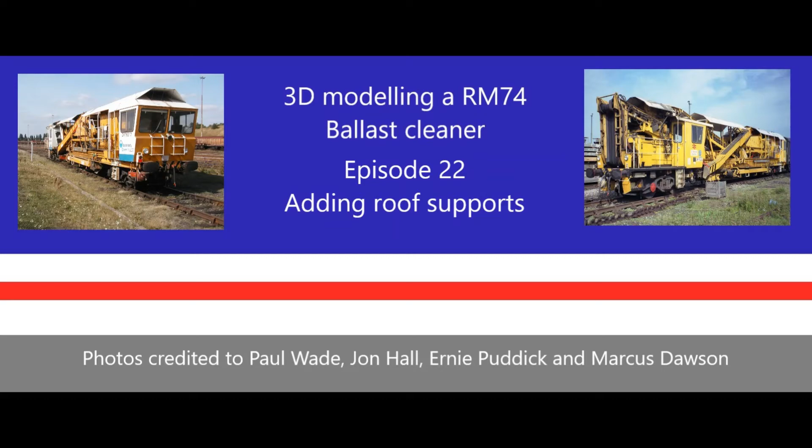In today's episode I'm going to look at adding some more supports for the roof sections that we've drawn, specifically looking at these three in this area here. There is a couple more that we'll be looking at on the left hand edge here. We're looking to do these three to start with.

And looking at the parts themselves, they actually look like they're all attached to the spoil conveyor belt. So obviously we'll model that the same. And this one on the end here, this looks like it's attached to the inside of the pick conveyor.

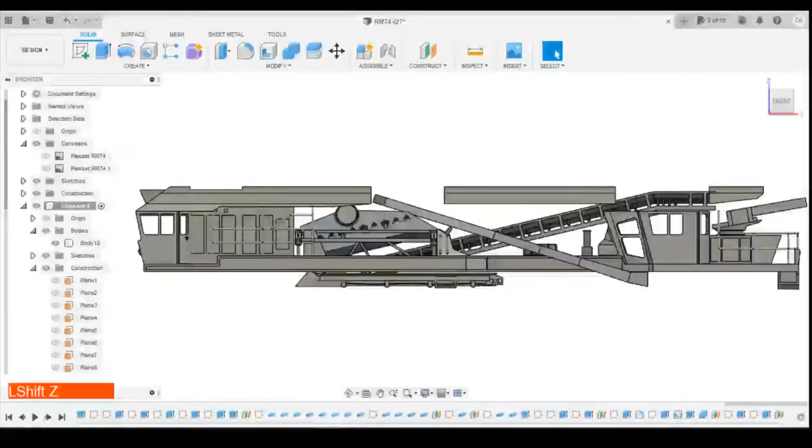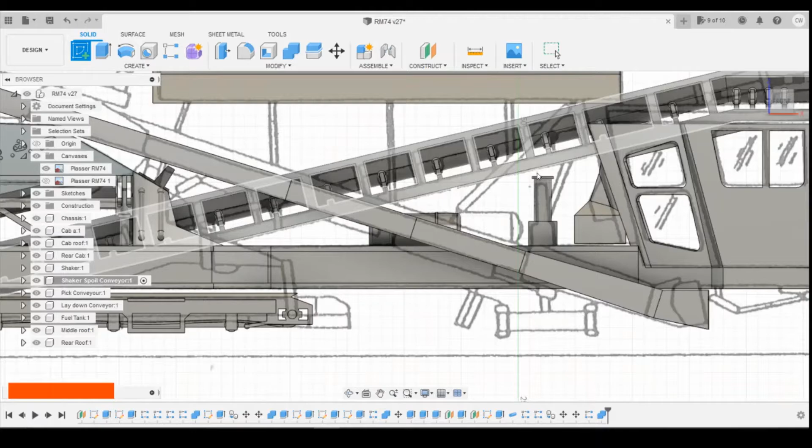So jumping into Fusion, if you look at the canvas, they're all drawn on here so we can get the relative positions there nicely for them. So the first thing we'll do is make sure we've got the shaker spoil conveyor selected, which as I say we're drawing on the side of this. So zooming in, I'm going to create a sketch on the outside surface of that conveyor belt, and we'll start by just doing the rectangle.

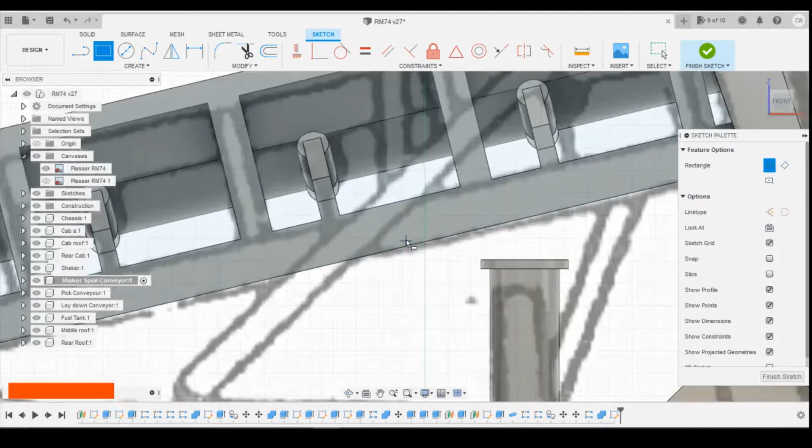I think, although looking at the shape it's a piece of right angle iron, parts would be too small really to draw them on to scale and expect them to print particularly well, and then be strong enough to hold the roof at the same time.

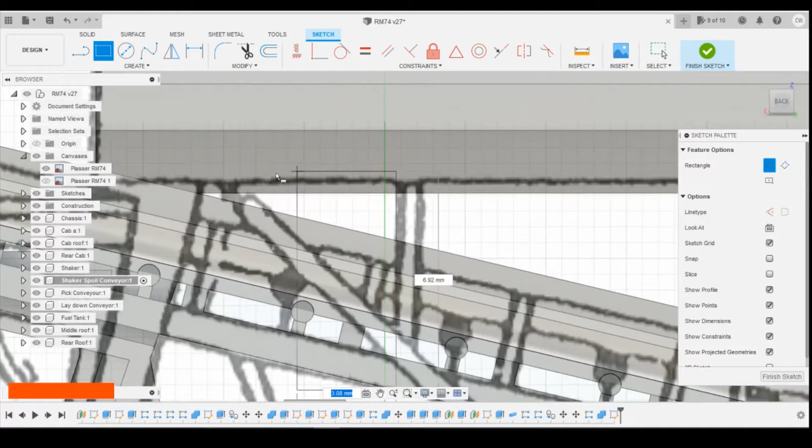So I've just selected a point which attaches to the bottom of the part here, and then we're going to come up and draw an upright that's going to come up to, spin this round to the back. It needs to be touching into the roof. So let's create the width. Looks like it matches about right. So we'll define

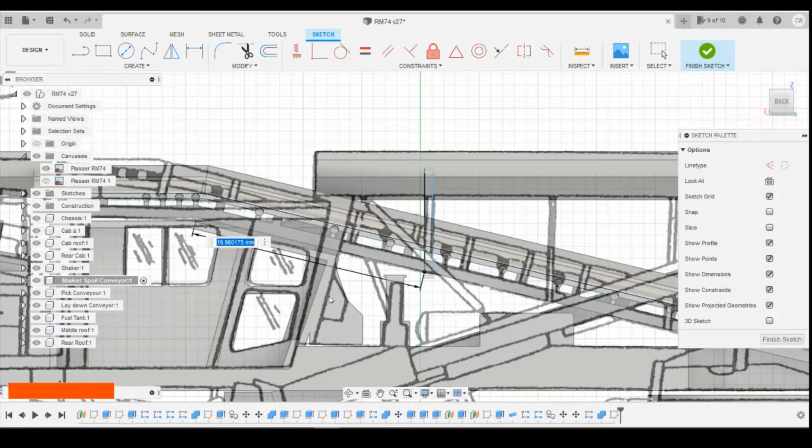relative position. I'm going to go from that end of the diagonal part here, so let's change that to 20 just for ease, and then we'll say thickness 0.7 millimeters.

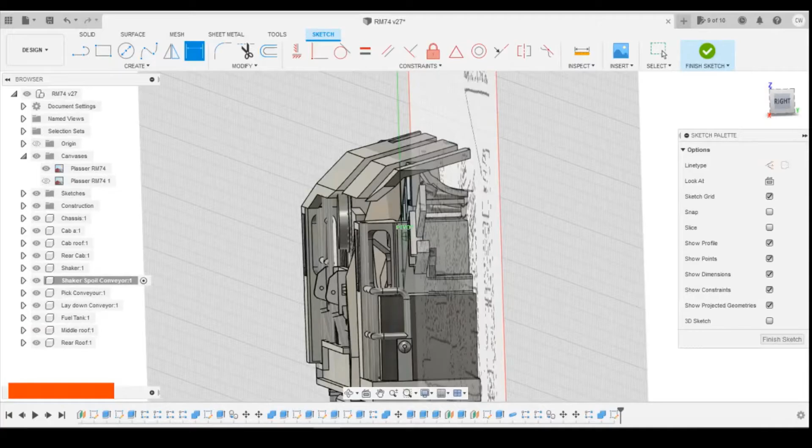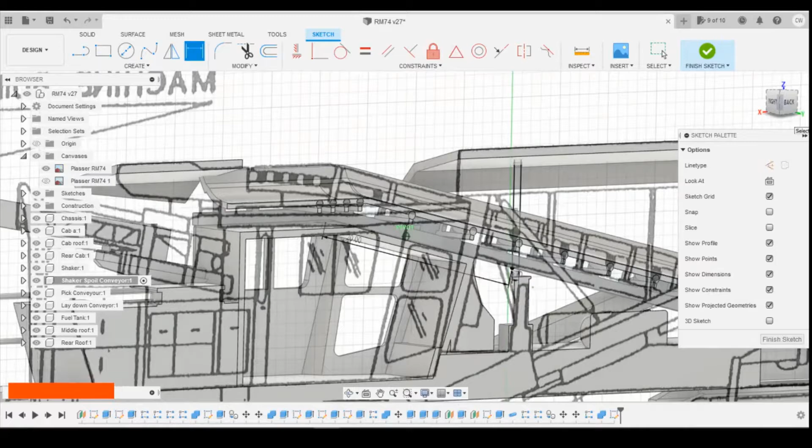Actually getting the height is going to be a bit difficult. What it might be better to do is draw the other direction, draw 90 degrees to it. Then we can match this profile. No, what we can do is what we're doing at the moment. Got a plan here. So if we do that 9 millimeters.

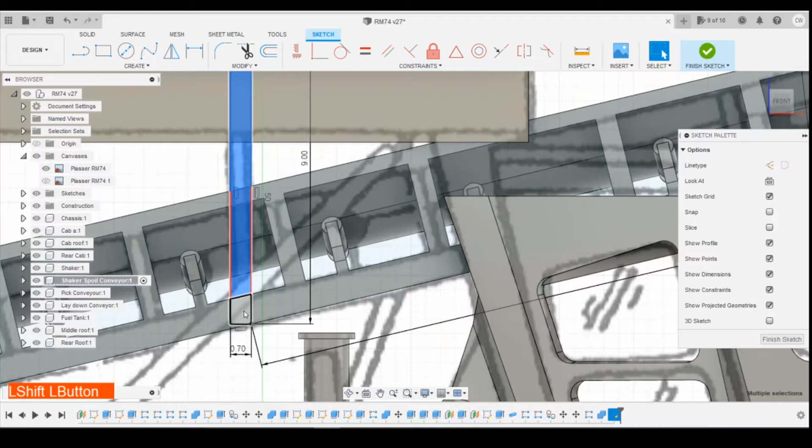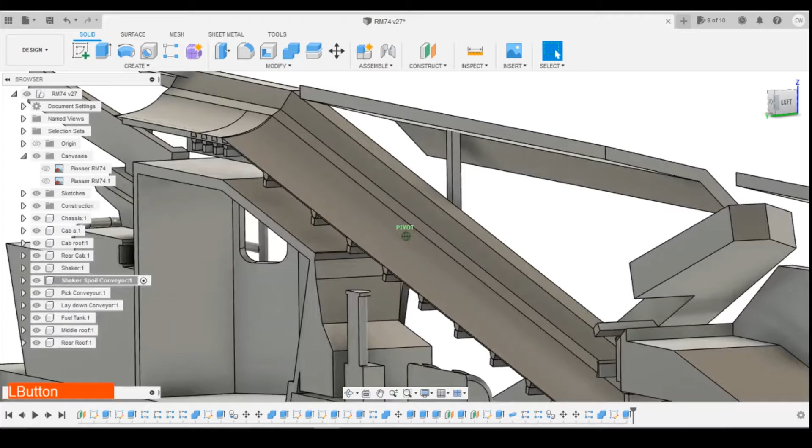Select the various profiles that we've got here. Hold shift down while you do it. And we can extrude that. I think maybe 0.5 millimeters. So it's a new body, I think, initially. Okay, and let's have a look what we've got in here. So see how it's gone up into the roof, that's fine.

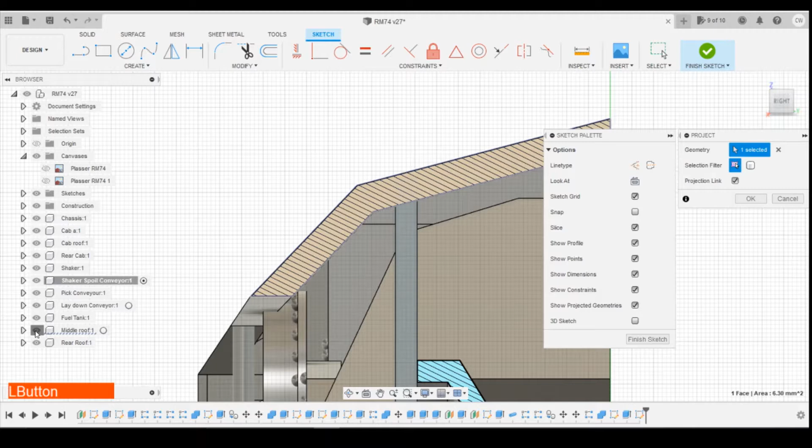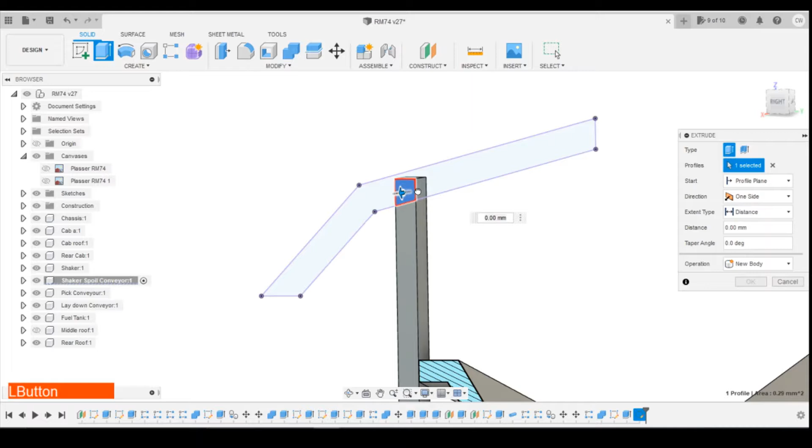So what I can do now is do a sketch on the side face there, slice through, project that angle on, and then turn the roof off. Project that angle, okay, turn the roof off, now we can get that profile, okay. We can extrude that off the top. So that would then match the same profile as the roof there.

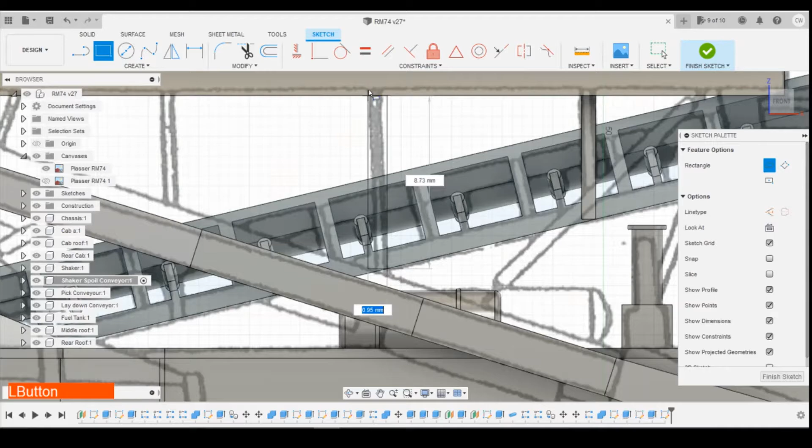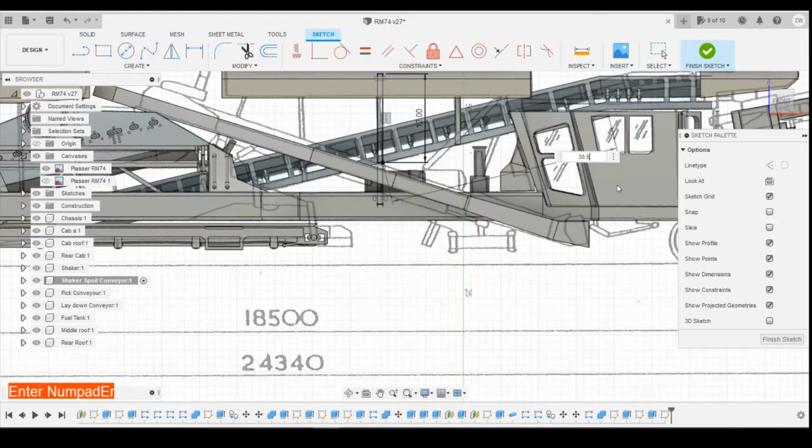Let's do the same for the next one along. So again, same sketch on the side profile here. So width is 0.7. Let's go 12 millimeters up. Define the distance from there to the top, 30.5. 6. There we go.

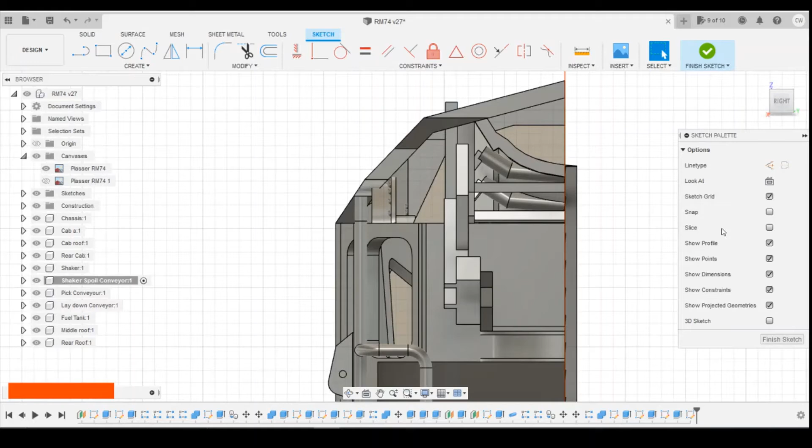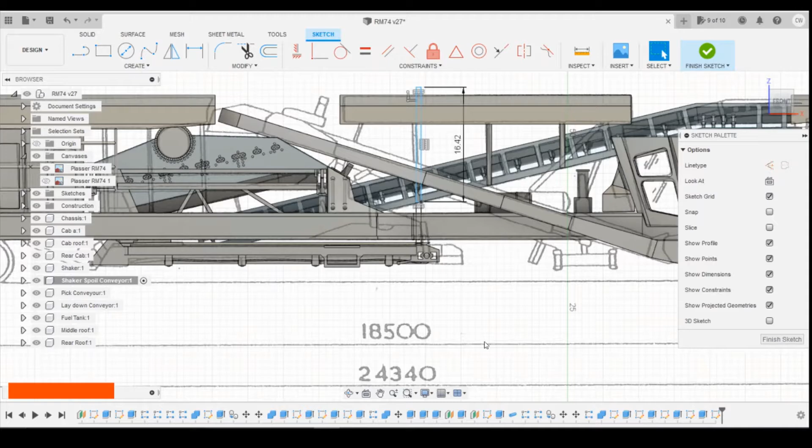And then we'll extrude all of these. So holding shift down again, selecting these profiles. Extrude 0.5. Sketch on the side there. Slice through. Project the roof profile. Turn the roof off, and then we can extrude that off the top. That's that one.

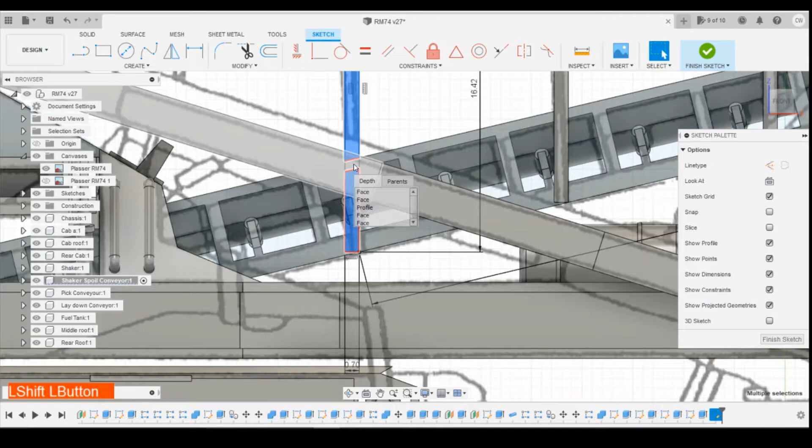And do the same for the last one here. Width 0.7. Doesn't matter about the height because we cut the top off. I'm going to move position down a little bit with the dimension here. So I'm going to say 41 millimeters, a bit more. 1.2. There we go.

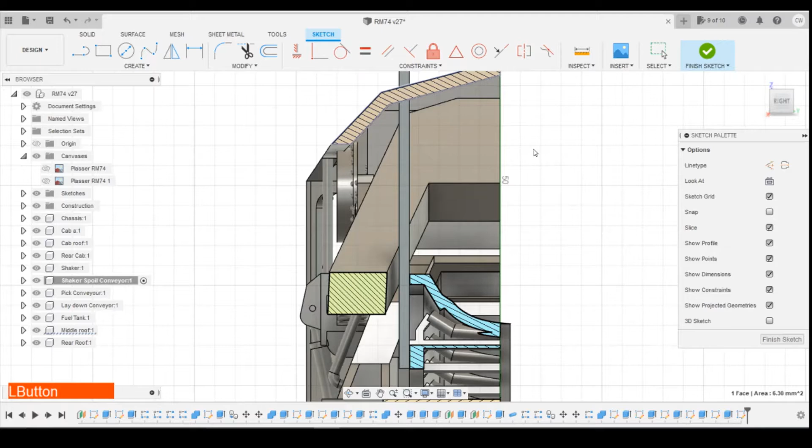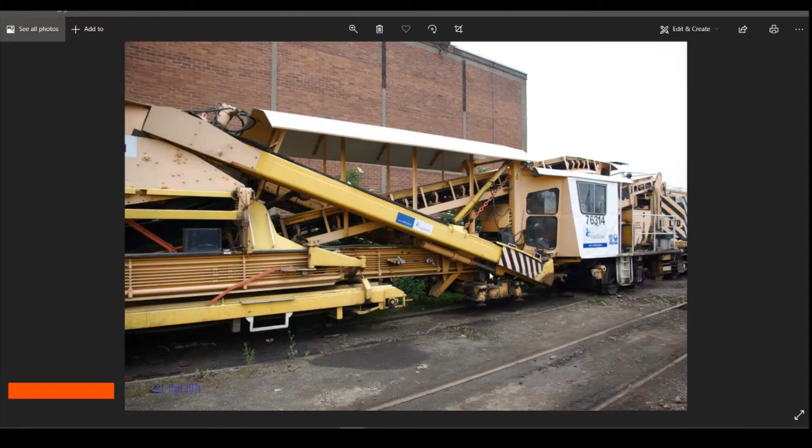Then select all these profiles. Extrude by 0.5. Make sure it's not clashing on the side of that conveyor belt here, which is not. It's good. Turn canvas off, create a sketch on that inside profile. Slice, project that line there. Turn the roof off. Select the profiles and extrude that to cut that off. And roof back on. Okay.

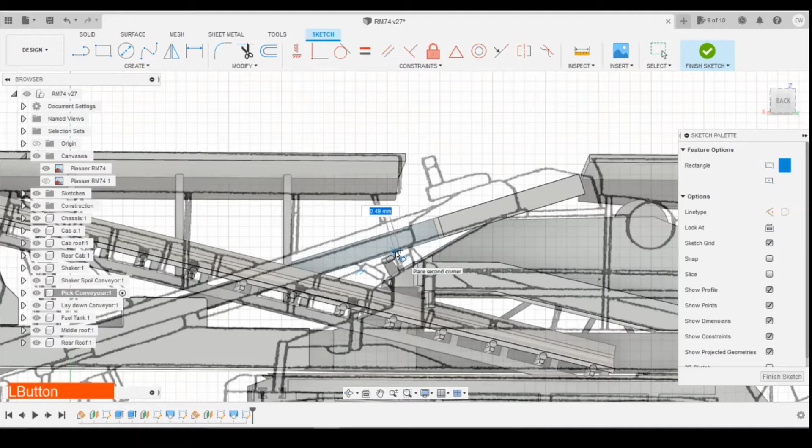That's those 3 drawn. Okay, so the next thing we're going to do is look at getting this one done, which is on the inside of the pick conveyor. So we're going to swap over to pick conveyor, turn that canvas back on, and we're going to draw a sketch on the inside surface here. Let's use a rectangle. We'll attach it to the bottom here. Actually, we're going to need to use a 3-point rectangle. It's not going to work using a normal one.

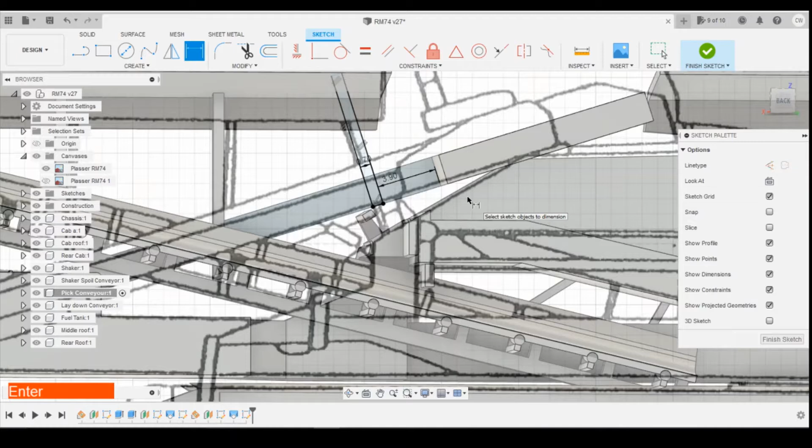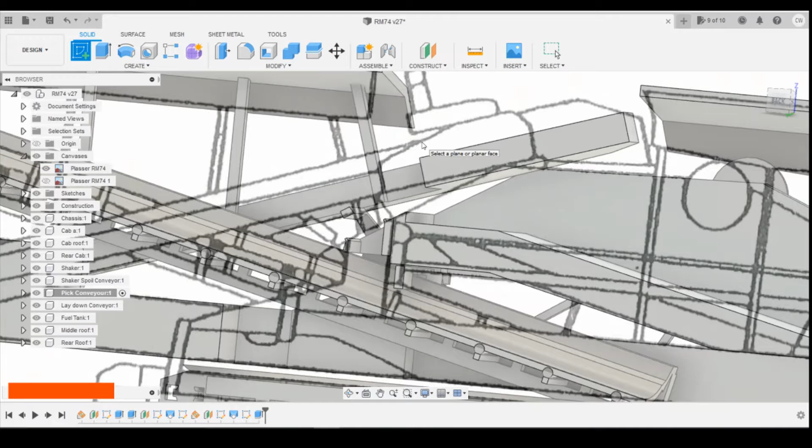So we'll connect the base, come across 0.7 like we were before, snap it in, and then drag that up through the top of the roof there. Define the distance from that point to there. Let's make that 3.9. Okay, and then we can select those 2 profiles, extrude the 0.5 thickness that we had,

and then we'll do the same as we did previously. We'll, actually, because it's an angle, that might be a problem. Create a sketch. On that plane, slice.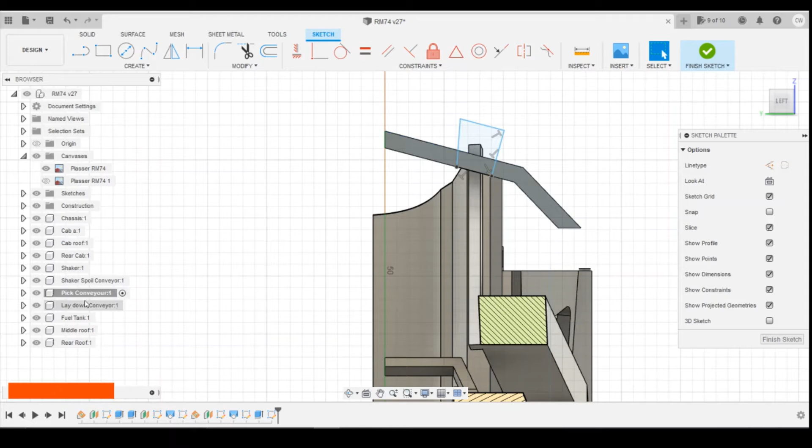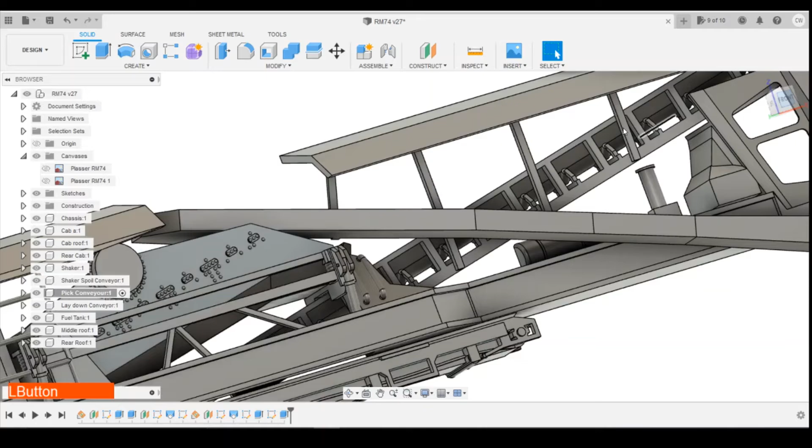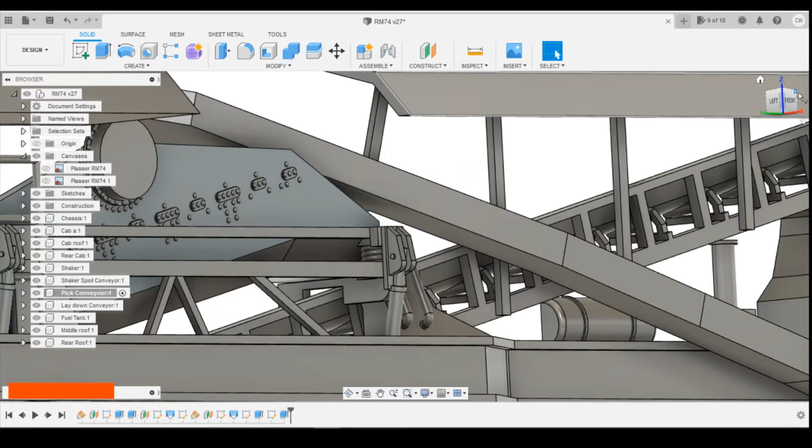We draw a box that will encompass this area. Turn the roof off. Select the profile, extrude. That'll cut the top off at the weird angles that we're going to have there. And then put the roof back on, it will sit on nicely. There we go. And that matches, obviously it's going to be attached to that, joins in across the top.

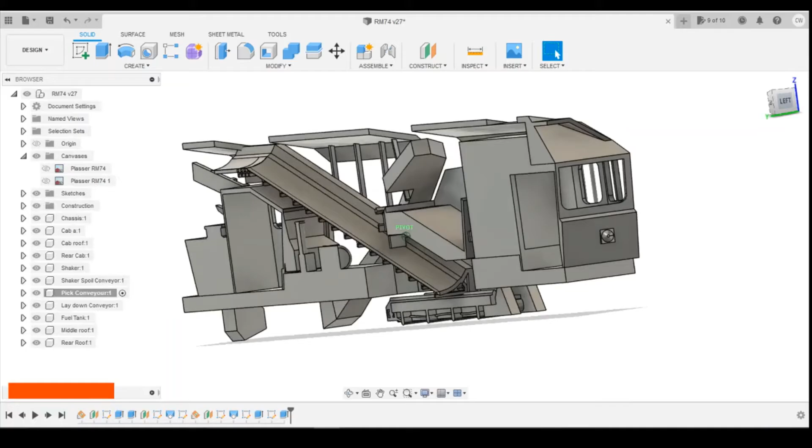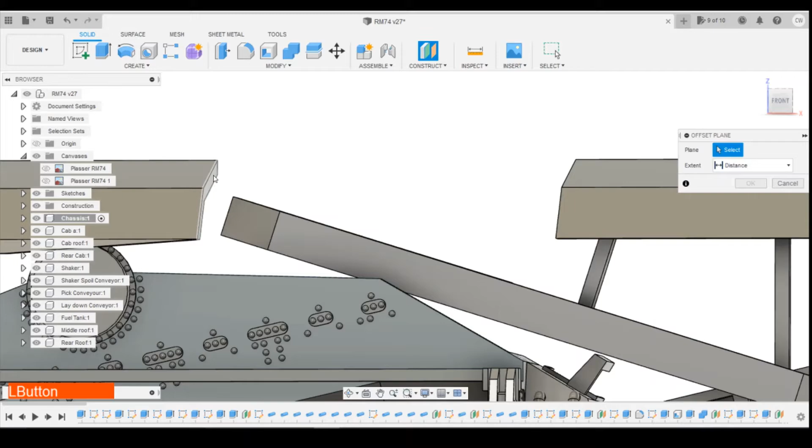Okay, looking at the picture here, there is a brace bar that goes across, so we can draw that on. Actually no, because that's an angle that will be a nightmare to draw, because while we're not symmetrical, it'll try and be diagonal. We'll wait until we've mirrored this all over, and then we'll add that part in. Okay, so that's all the bracing done for that. Next is to draw on this bracing here.

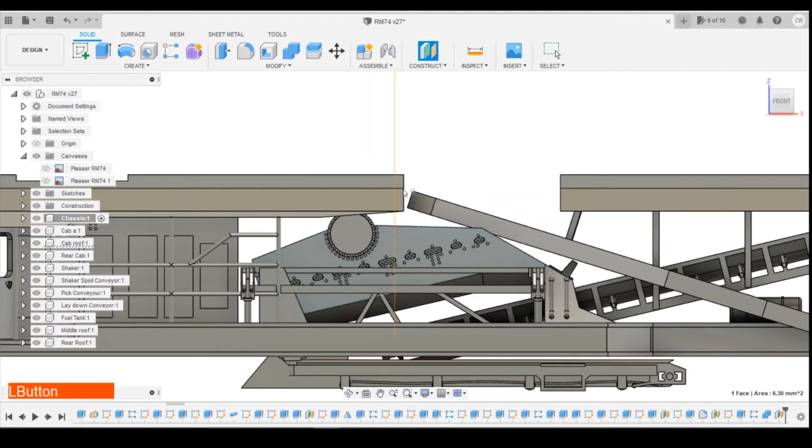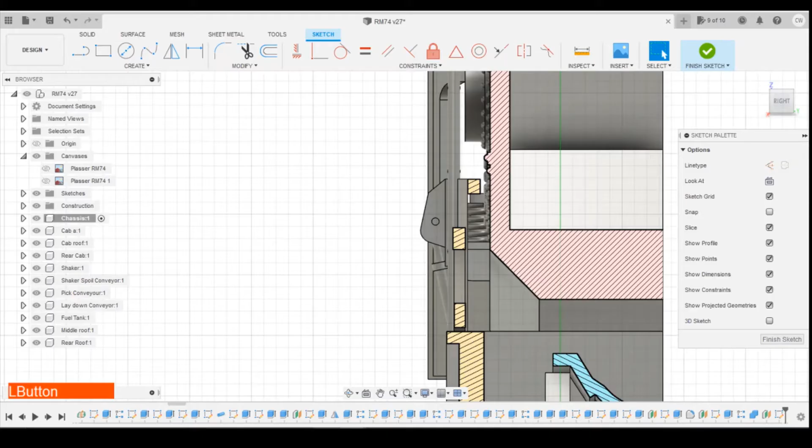Coming to Fusion, we're going to do this on the chassis, so selecting the radio button for that. We're going to try and create an offset plane that we can draw off. So I'm going to offset it from the end of the roof, and then we'll look to see the position that we need to be in. Looking at that, maybe 6 inches from the end of the roof there. So if we come back, say a millimetre, look compared to the triangular piece, yeah, that's the right place. So a millimetre back from the top edge of that roof, I'm going to create a sketch on that plane. I'll slice through to draw it.

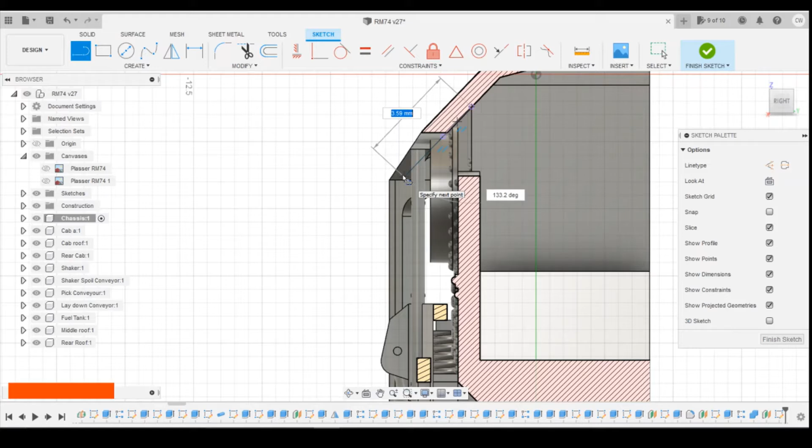Okay, so looking at the photographs, the bottom part comes out diagonal, round the outside of this frame here, up, and then diagonal into the roof profile. So I think I'll start at the top, so go underneath the roof. You can see it's not attaching to that profile, so we'll project that on. We'll project on the chassis top frame there.

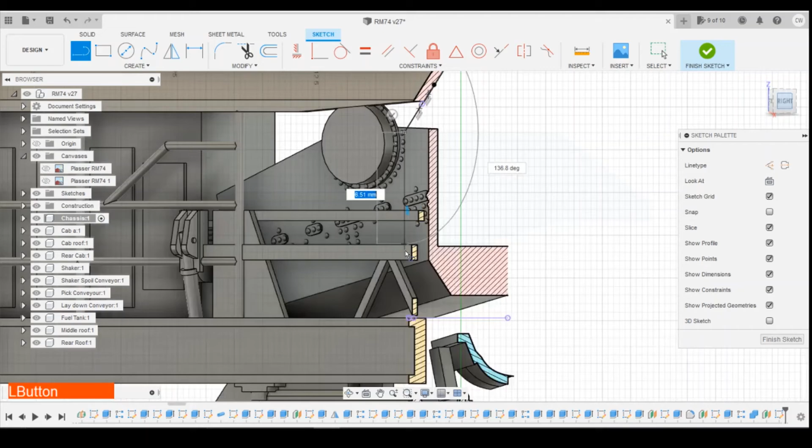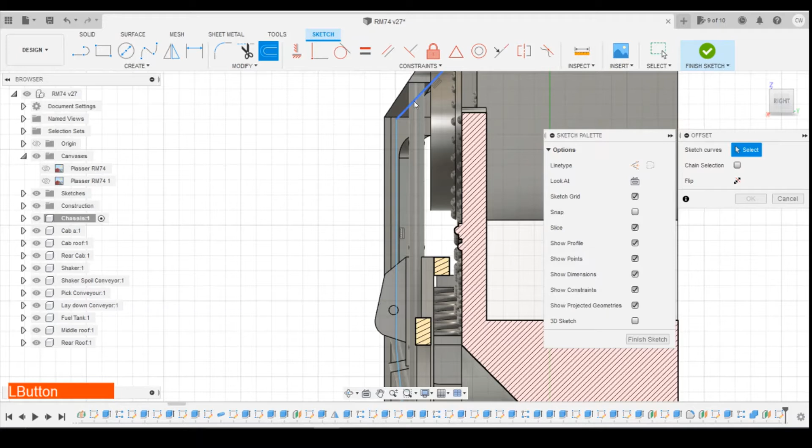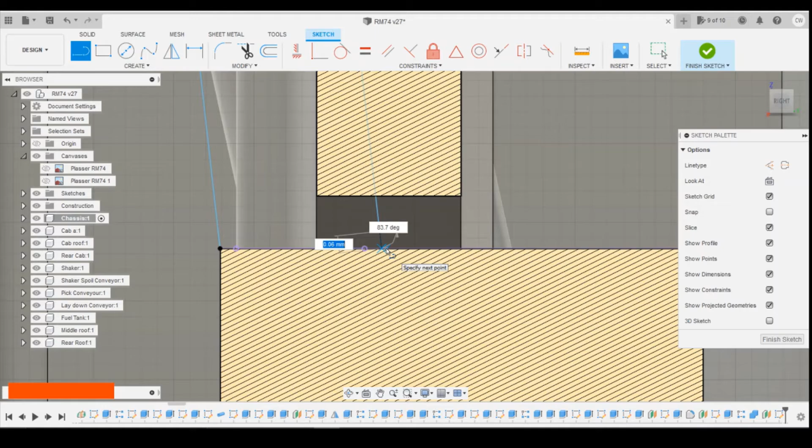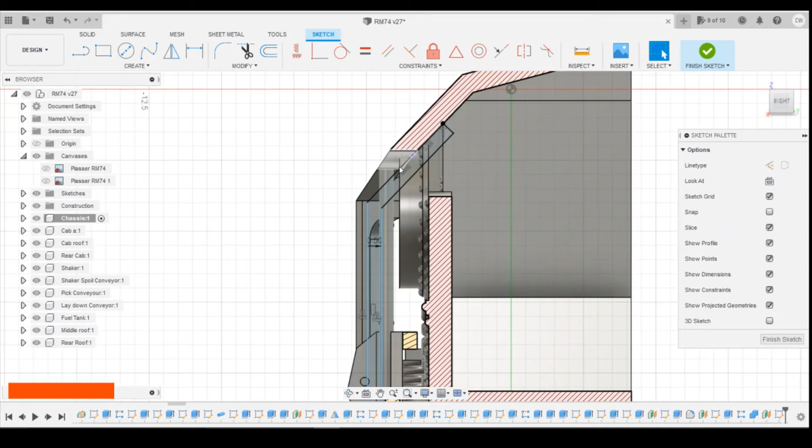Okay, so let's draw a line from the inside of the roof. We're going to come out, it's got to come beyond these parts here. So we'll come out, we'll dimension this in a bit, come down, diagonal back in just after here. So we'll come down to that position there, and then diagonal in to the end of the chassis there. Okay, so let's offset the chain selection of those 3 lines. We'll come in by -0.5. That line we're going to have to draw down a bit more. And I'll just draw a line across there to close that off. We'll do the same at the top edge.

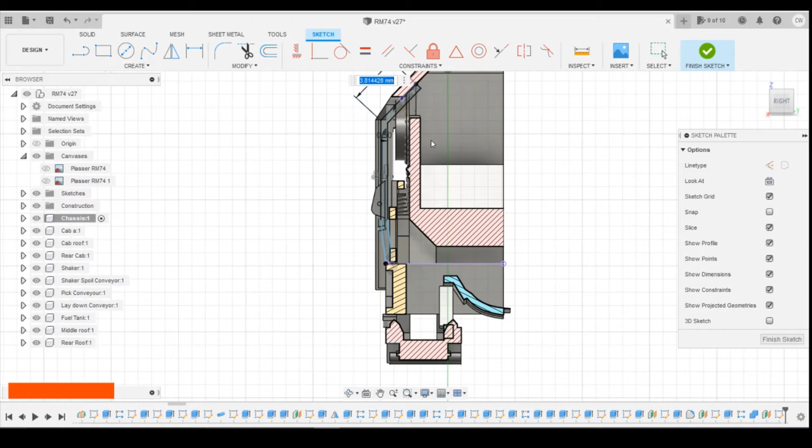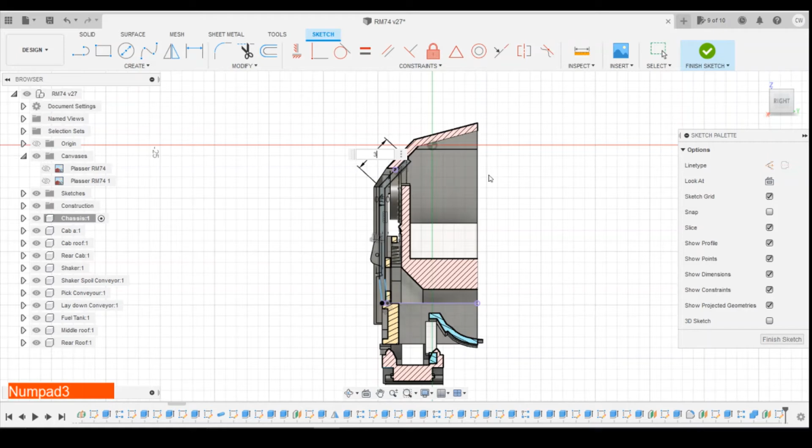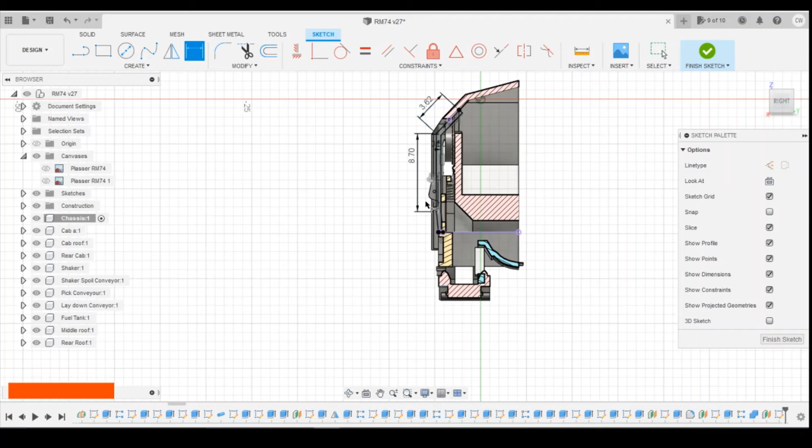What we could actually do is drag that up, no. Okay, so how does this look? That's probably about right there. We could actually bring it back in to have a bit more support on this. So to do that, we need to edit that dimension on this. Let's bring that back to say 3.7. You can see it's not quite, maybe a little bit more. 3.65. I want it to just touch ever so slightly. 3.62. It's definitely overlapping now, so when that prints, I'll add an extra bit of support to that.

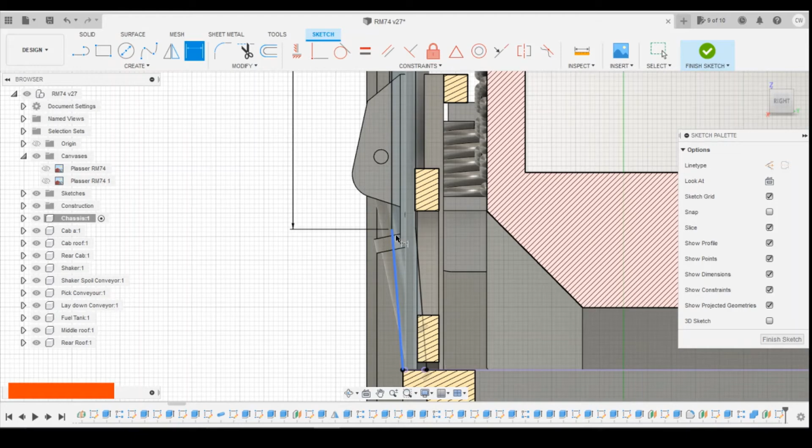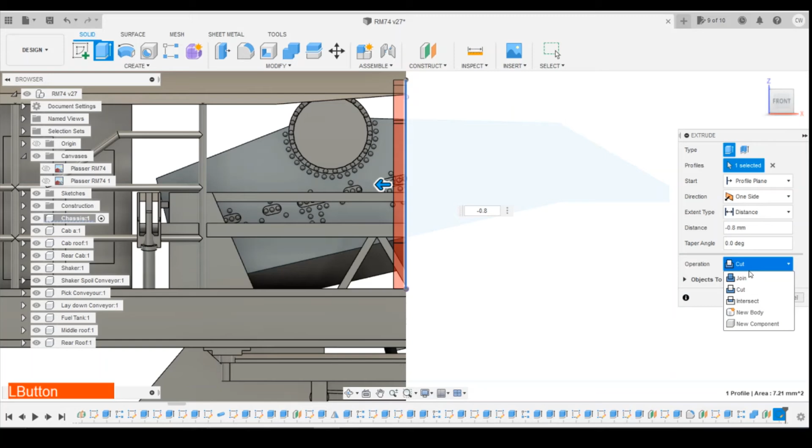Okay, height of this, we're going to reduce the height of this because as we've changed this one, it moved this part down. Still too far down. 0.5. No more. Okay, let's go 8.2. Right, even shorter. 8. Okay. And then that's defined this part at the bottom height wise.

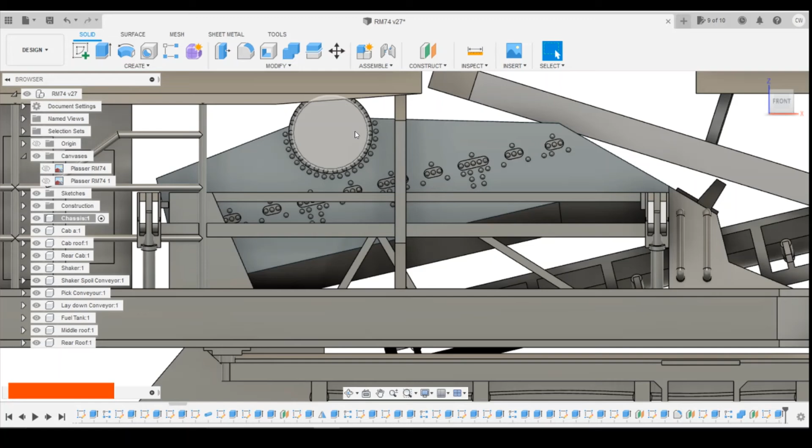So if we then select that profile, extrude that, rotate it round, we can come back in minus 0.8. How does that look compared to the images? Maybe a little thin. Don't want to go as thin as these, which is 0.6. You can see from the photographs this is definitely thicker than those. Okay, so that's that one.

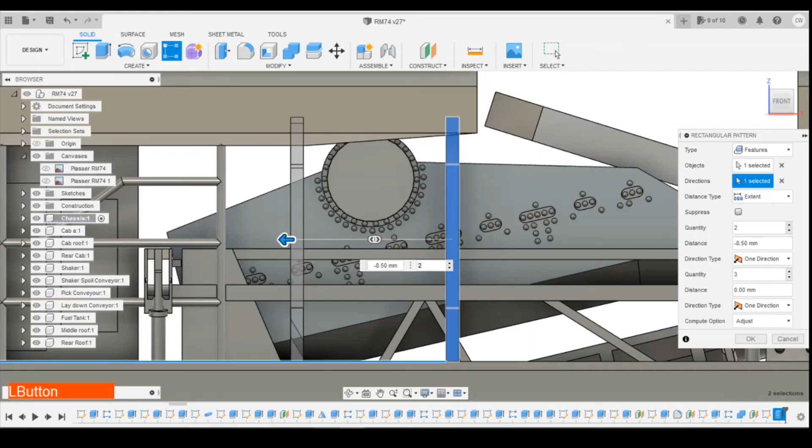This one's got slightly higher on this angle here. The bottom part's the same, it's just going up slightly, and it's only a tiny bit. You could do the same process if you want, just draw this again profile wise, but I don't think I'm going to bother. It's not going to be noticed. So I'm just going to pattern this one across. It's only a tiny difference.

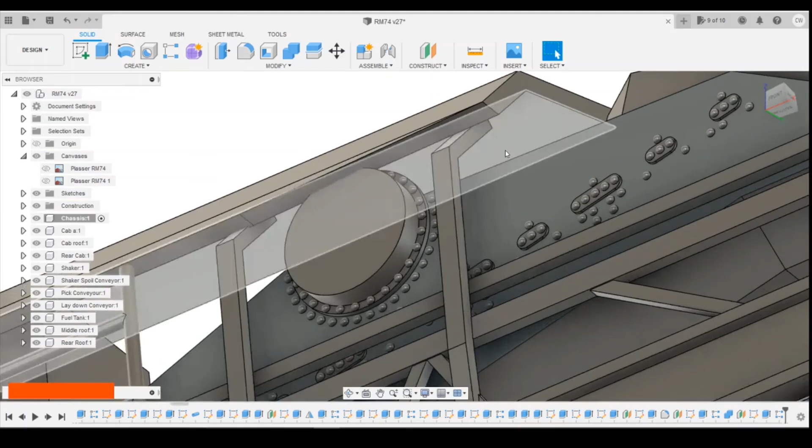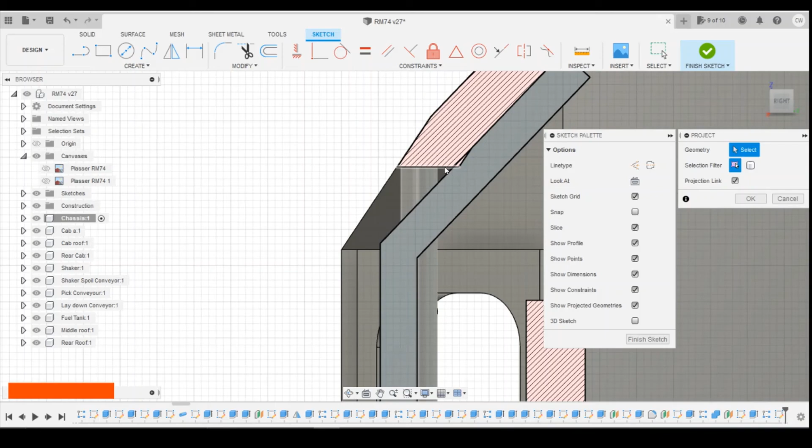There's two of these. The position of that is relative to where this angle starts. So I'm going to go there, minus 8.5. I'm not going to bother bringing this up slightly. It's still the same profile, it's going to match everything else. Ooh, actually, we do need to make a change to this.

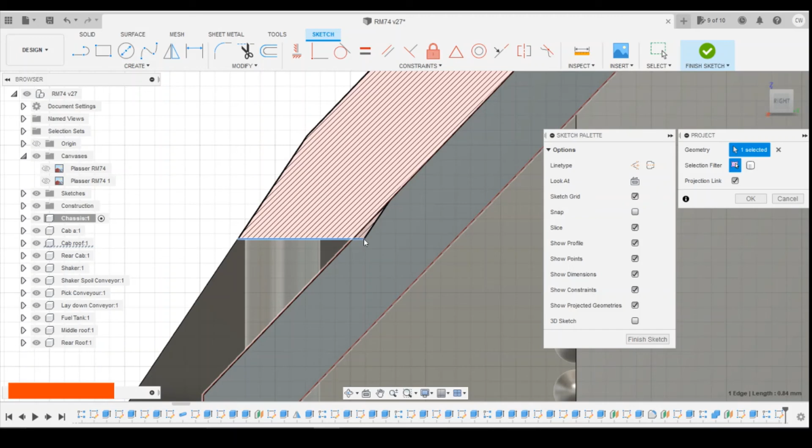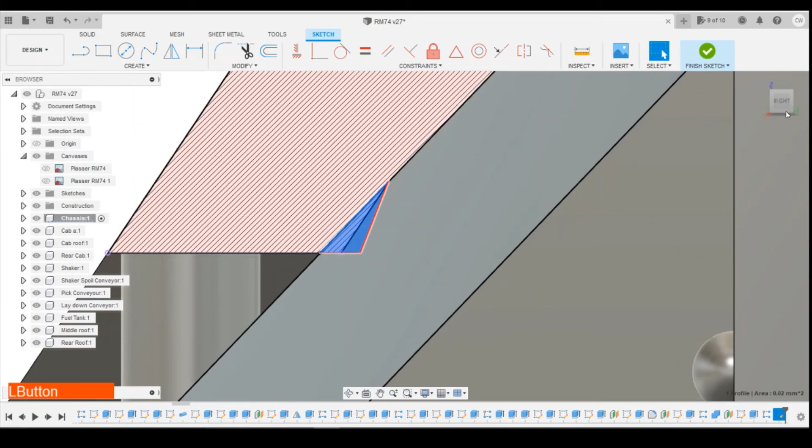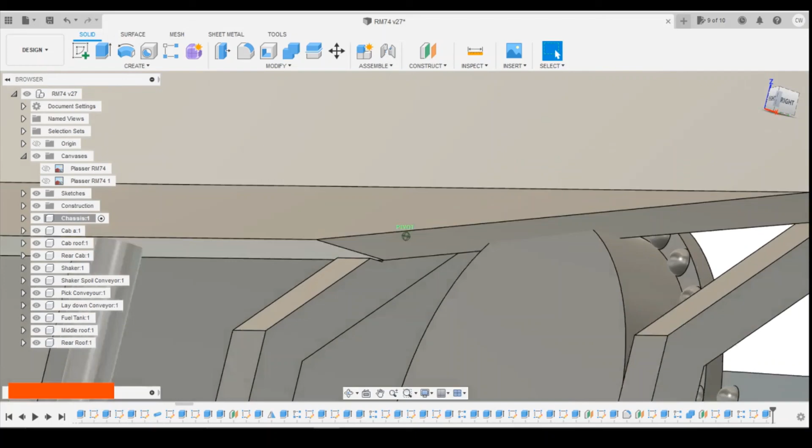Okay, so let's draw a sketch on there. Slice through. Yeah, that roof comes down there, so then project on that line. Okay, so what we'll draw is we'll just take a cut out off of there, extrude that profile. Now you see what we're looking at. There, that cuts out a little V that this can then sit in.

So that's those two drawn, and these uprights here. So I think I'm going to end the episode there. We've got all those added on as we wanted.